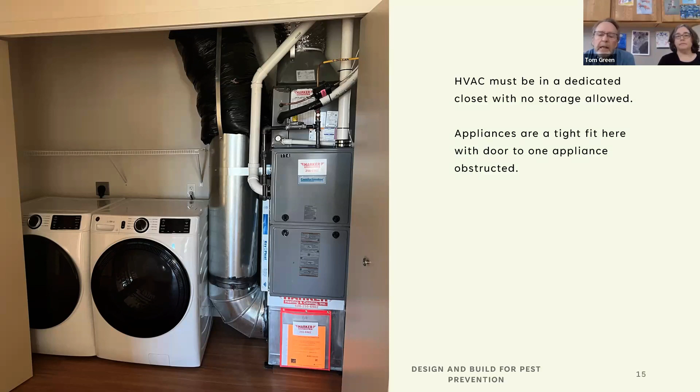There are utility closets in each of the units. Some were designed with just the HVAC units in there, and some with a combined configuration with the laundry equipment and the HVAC, which is not ideal. You really want the HVAC in a dedicated closet. In some cases where that was the case, the closet has extra space, which is attractive for storing things, creating fire safety and other concerns. You really don't want that happening. So that was one of the design issues we ran into as well.

So we talked about, for the next couple of phases, let's just have dedicated utility closets where the HVAC is in there, and let's take that extra space and put it outside of the closet so it's usable space.

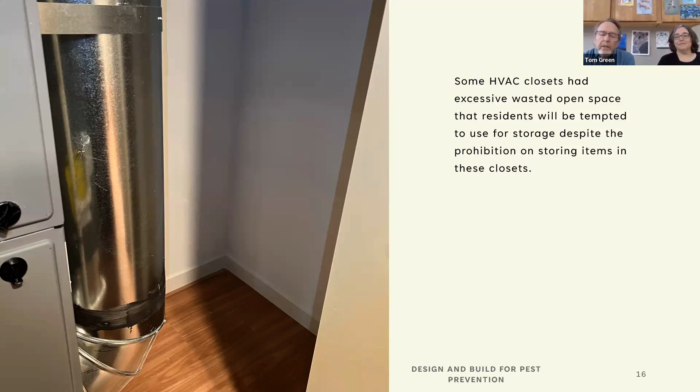So we're going to be struggling with encouraging residents not to store items in here, yet there's attractive and usable space in there.

This was another issue. We have some exposed wiring that runs from that HVAC into the wall here, and if residents are storing things like brooms in the closet, this is going to be really vulnerable to getting pulled out of the wall.

You'll notice too that the gap in the wall is sealed with fire caulk, which is really not ideal. Fire caulk is that red clay material, and it's designed to prevent heat and flames from traveling through a penetration.

But it's not elastomeric like a sealant would be that we want to use to close up gaps, so that as this wire gets bumped and flexes, it doesn't open up a hole there.

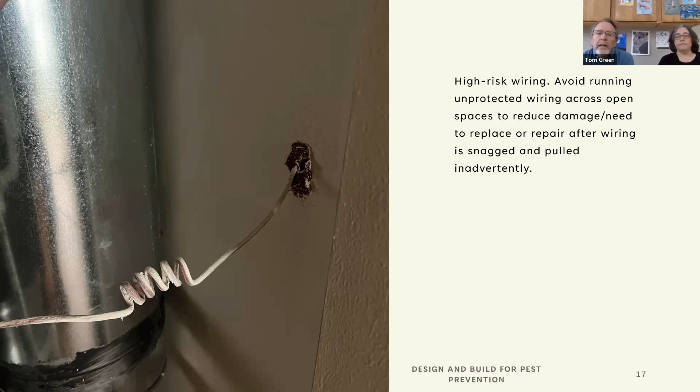And so we went through and ended up resealing these situations here.

And that, of course, is great cockroach harborage and travel away from that under sink cabinet out to the kitchen.

So the cabinets are built and then fitted into these units. The units have various designs with different shapes and lengths and so forth.

And of course, that's very problematic as harborage for both cockroaches and mice.

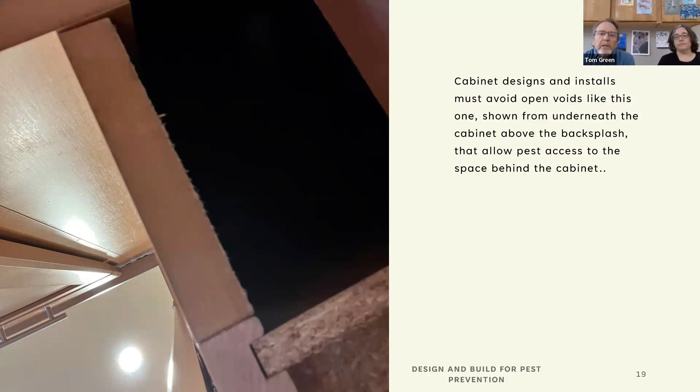The wiring for the fan and the hood underneath the range runs through the upper cabinet, and so those wires run through the base of the cabinet, as you see here.

None of those openings were sealed up.

So this is all work that we ended up having to address after the fact. And really, these-

The wiring here should not be running through the panel there. It should be hardwired, and the wiring should be in the wall behind the cabinet and not running through the base of the cabinet. So another design issue there.

And of course, this is ideal cockroach habitat and needed to be sealed up after the fact.

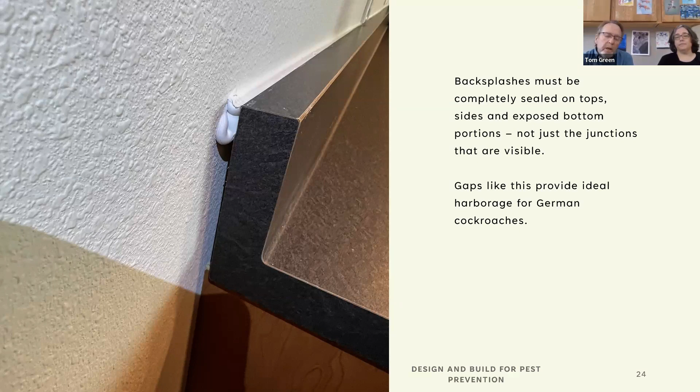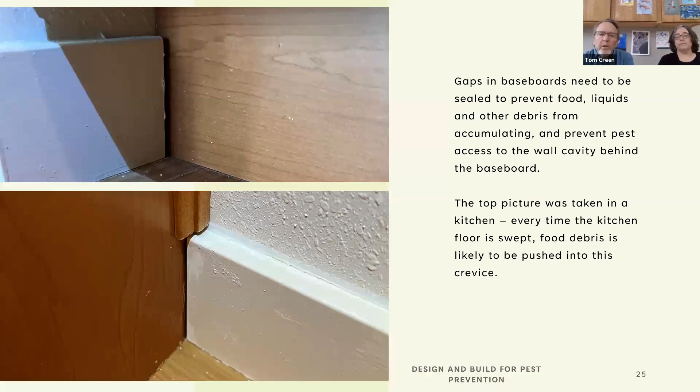And so we went through and pulled out all of those ranges and sealed up these gaps. Here's some other examples of gaps that provide great cockroach harborage down at baseboard level. The bottom example is in a bathroom, and the top example is in a kitchen. So again, we went back through and sealed up all of this after the fact.

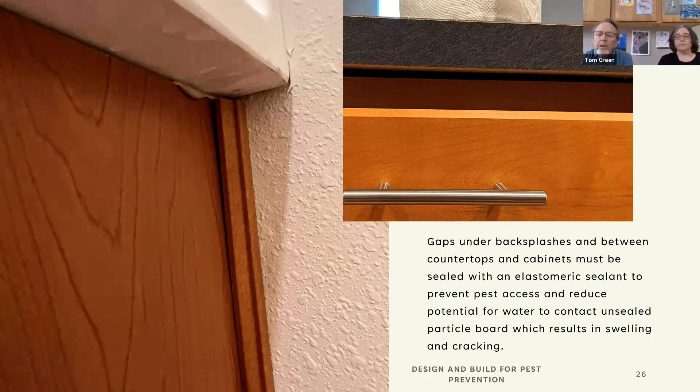Another gap here where the trim piece was just not put in tightly all the way up, and of course, that's great harborage for cockroaches. And then on the right, many of the countertops didn't meet up with the top of the cabinets, providing a great travel way and harborage for cockroaches. So we went through all the units and sealed those up.

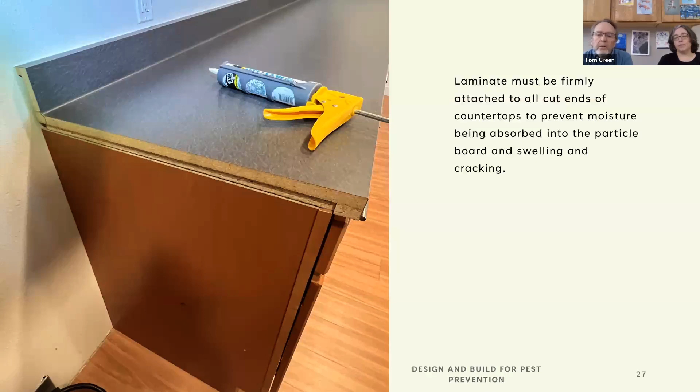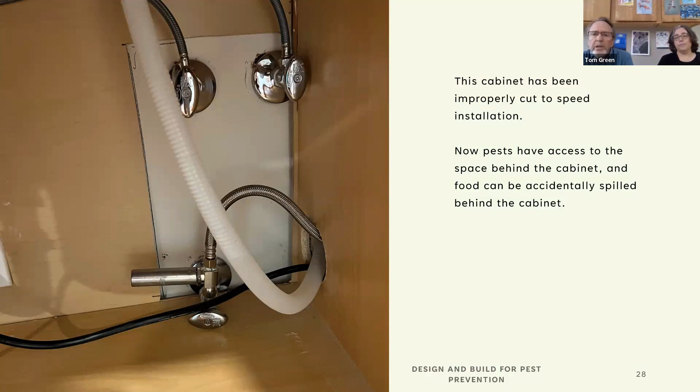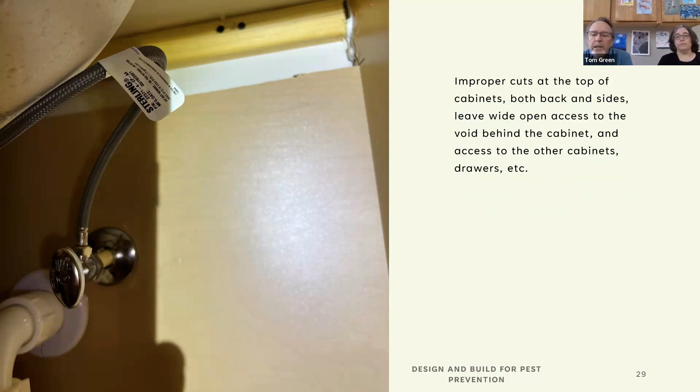So what we had to do was go back through and seal those, and we'll show you some pictures of those. Here's another cabinet that was cut quickly, cut short. You know, if you cut things short, you know it's going to fit in there, and you don't have to fuss with it. So that's what happened here.

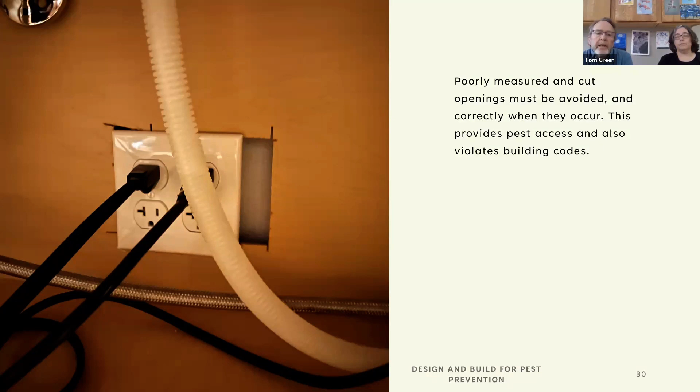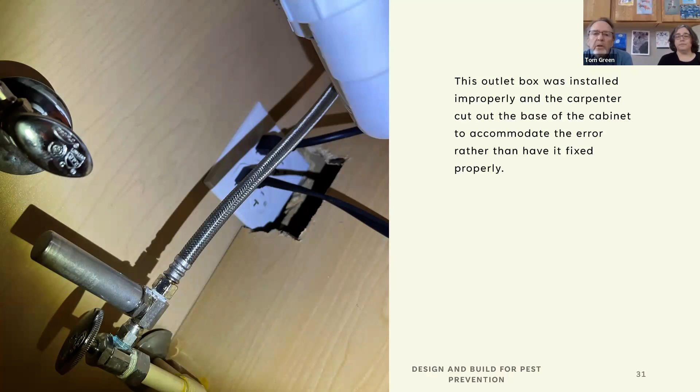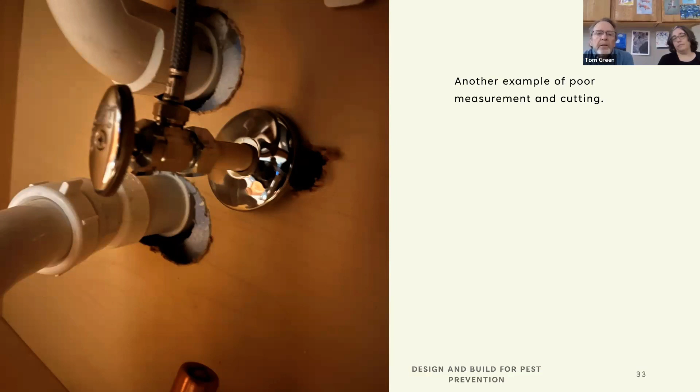So here's an example of some of the corrections that we made. Each of the under sink cabinets had connections to the adjacent dishwasher on the other side of the cabinet wall here, and there was a large round hole cut there for those penetrations. What we did was take Xcluder material. This is the stainless steel mesh, and we stuffed that penetration to the dishwasher with that to create a tight seal.

And that allows us, when we need to pull that Xcluder out to change a dishwasher, for example, there's no sealant in there, that's just a very tight fit. I like to use the Xcluder blocks for something like that. They're 2-inch by 6-inch by 2-inch strips, and they work really well for that. And then there's some Xcluder used as well adjacent to that electrical outlet to seal that box up and still allow it to be removed if that electrical ever needs to be repaired or something needs to be replaced there.

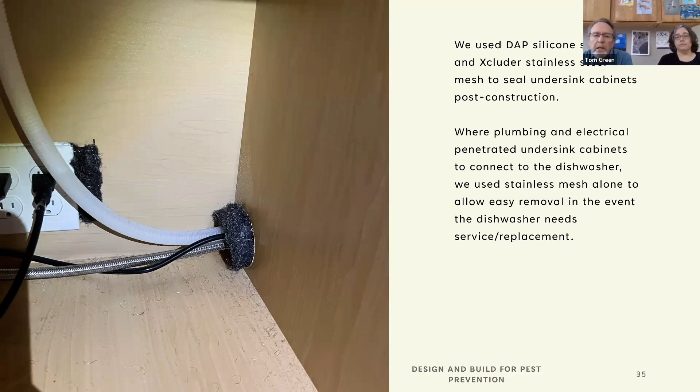Here's some examples where we did seal in the Xcluder strips. I also use the 1-inch strips that come in rolls. They're easy to use in a situation like this. What we did was use an elastomeric sealant, caulk with silicone in it, to glue this Xcluder permanently in place to clean up the issues there. So now, no more harborage, no more travel ways behind the cabinets.

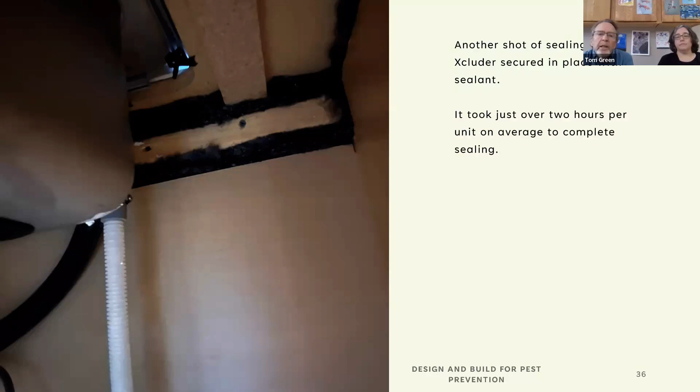Another thing that we did is we went through all of the units and sealed underneath the baseboard. It was rare that the baseboard was really tight against the floor; there was almost always some sort of gap there. Again, we used a caulk plus silicone sealant, and the product we use goes on white, so you can easily see where it's been applied, but then it dries clear. So the white lines that you see under the cabinet, along the baseboard, around the toilet, those all turn clear as that material dries and doesn't stand out at all. It looks very attractive.

You know, there's a debate about whether you seal under toilets or not. I'm a toilet sealer. Some people are not.

In this situation, in this community, we have residents of different income levels, different ages, different health statuses, different physical abilities, just like any community.

What I find is if you don't seal around the base of the toilet, you will invariably get urine spilling and getting underneath that toilet, ending up with odor issues. So I seal. At some point that toilet will have to be removed and the seal cleaned up and replaced. It's a little extra work, but it goes a long way in keeping that flooring in good shape. If liquid gets underneath the toilet, it gets soaked up by the cut edges of the flooring material, causing swelling and buckling over time. So I'm a sealer, and that's an example.

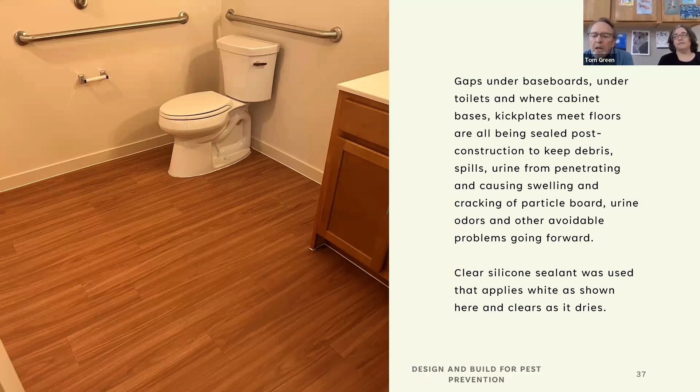This is an example of behind a range. When we pull out the oven and cooktop, you can see there's an anti-tip bracket here, a tip-off that we've got a range going in there. The baseboards weren't complete behind those, and there are a number of reasons why you don't want to leave a situation like this.

Number one, cockroach harborage. There's space now between that floorboard and the back wall board. You can see there was a piece of wallboard scabbed in to cover the gap between the bottom of the big wallboard piece and the floor, and that gap wasn't sealed. From the carpenter's perspective, nobody's going to see this, so they just leave it like this and shove the stove in.

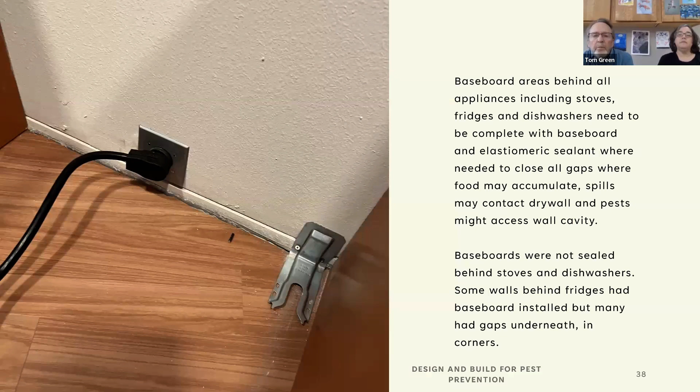But now we've got cockroach harborage, and gaps that might entice mice to chew through and make a larger hole, because they can sense airflow coming through the gap and understand there's a cavity back there they could use for nesting. We're also going to have an endless stream of food debris spilling off that counter and the back of the stove, collecting in those gaps. So we went through the units and cleaned all this up, and now that's completely sealed.

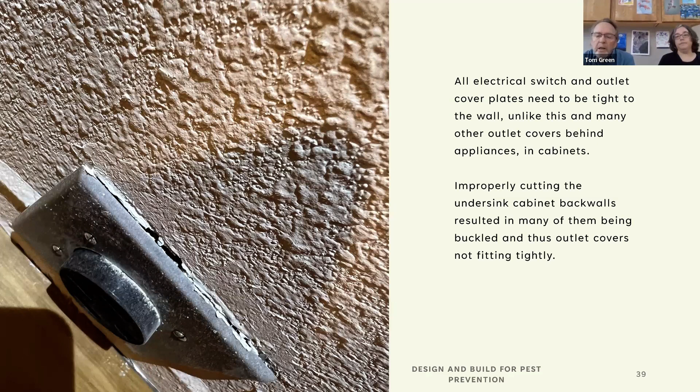Here's another gap, just incomplete sealing, somebody in a rush doing this work. We went back through and sealed that up for all the reasons I just mentioned, harborage and places for food to collect.

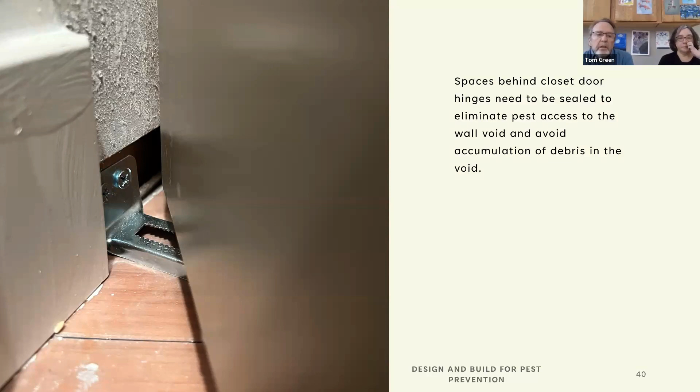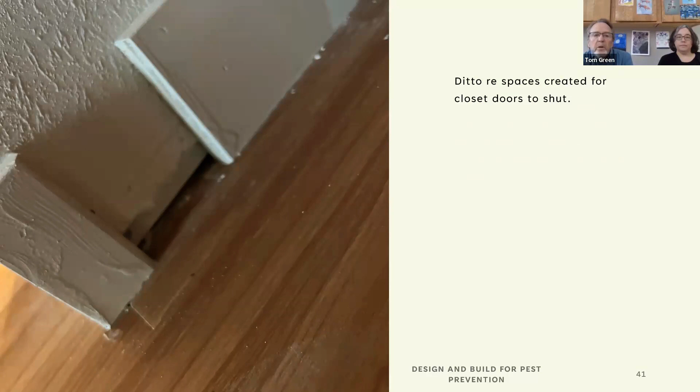Other gaps: the closets throughout the units have these accordion doors, and where the hinges were attached there was often a gap right into the wall, so you could see the insulation, creating a mouse hole. We sealed the bottom of the baseboard there and stuffed those holes with Xcluder. Here's where the closing part of the door meets the wall, and again the builders left gaps there, out of sight, out of mind, but we sealed them up.

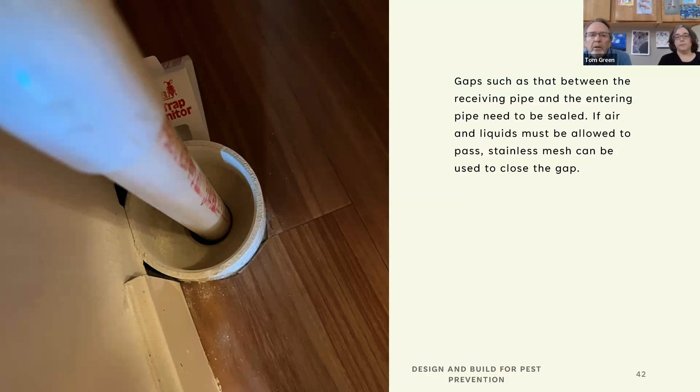This is a drain in an HVAC closet. We have the issue with the incomplete baseboard on the left, so we sealed up those gaps. Then I take some of that Xcluder material, which allows air and liquids through, and put it around this bowl where the pipe is going through. If there was a leak, it would allow liquid to go through the Xcluder and down the pipe chase, but it doesn't allow cockroaches to use that space for harborage.

Another example, HVAC closet plumbing penetration. We followed up and sealed that. The escutcheons weren't sealed to the wall, which is certainly in the design document under pest prevention by design, but again it was overlooked in the final construction. So we went back through and sealed all these penetrations.

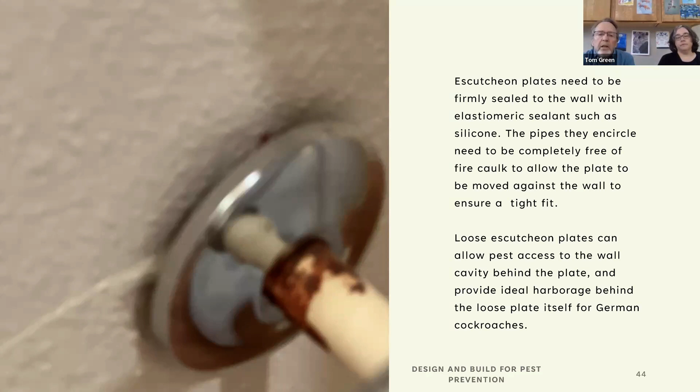That red stuff you see is actually fire caulk, and it's not productive in this situation because it dries hard. So what we'd have to do is clean that up in order to push this escutcheon plate against the wall, and we put elastomeric sealant behind it before doing that, so it stays attached to the wall. Another example, plumbing penetration, this one sealed with Xcluder.

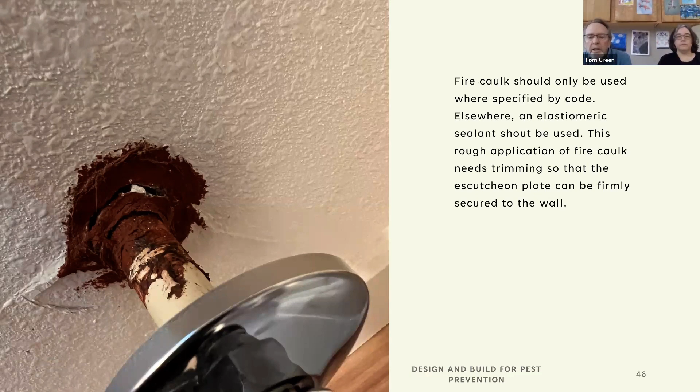Here's an example of that escutcheon being held away from the wall by fire caulk. We clean that up, seal it, and push it against the wall, because if you have that escutcheon plate held off from the wall by a quarter inch, you're creating great cockroach habitat behind that plate, even if they can't get into the wall. So again, just cleaning up and sealing that escutcheon plate to the wall.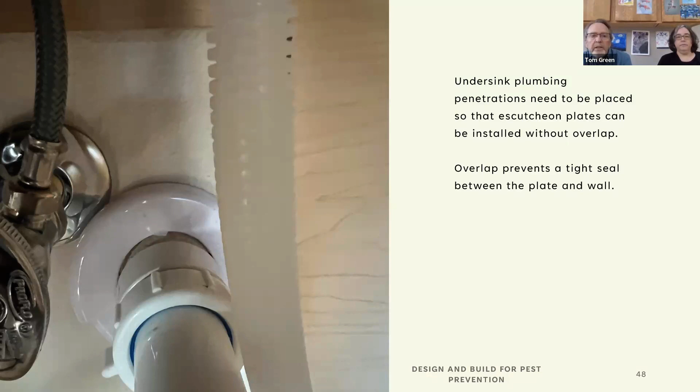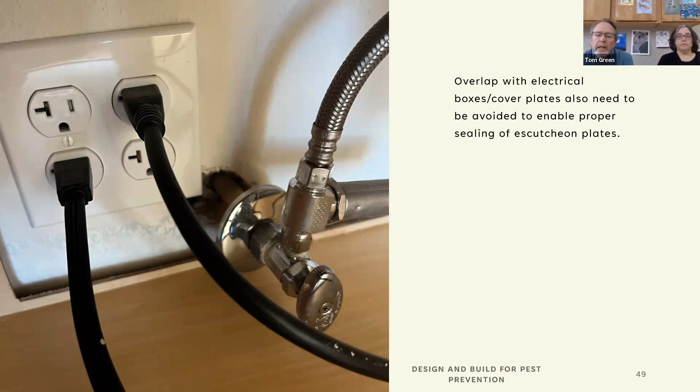Another example here where the escutcheon plate couldn't be fit because of the placement of the plumbing, and the electrical box was too close, too tight.

So that's I think a good overview of design issues and installation issues that we encountered in the building after it was turned over, on the interior. And we also had some exterior issues as well, and we'll go through those.

So just last week, Diane sends me a text saying, 'Hey Tom, can you look at this ground floor unit 119? The resident is reporting a squirrel building a nest.' So here's a design issue that many of the units suffer.

The units have balconies constructed out of wood, as you see here. The first floor units have these ledges on top of the masonry. So the first floor walls are masonry, and then up from there it's the wooden siding. And so there's a lot of these ledges in the outdoor patio areas of the ground floor units where that wall of the patio meets the joists for the deck of the unit above.

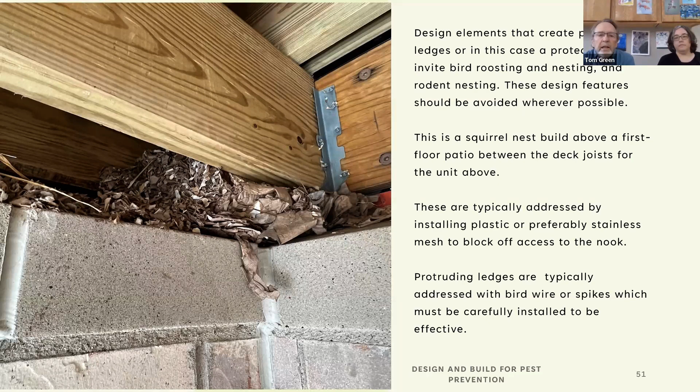And we had a squirrel already take advantage of that. So I came over right away. I wanted to try to get that nest out of there before the squirrel had young ones in there, and I managed to do that successfully, clean that up. But we'll have to go back through all of those cavities and block them off. What I like to use is stainless steel mesh, doesn't rust, stays pretty looking, with a quarter inch mesh, and we'll just cut pieces and staple them there to close up those gaps.

Another issue with the board siding on the building is that the siding boards are not tight against the siding board below. And of course, there are multiple pests that are going to take advantage of that situation - box elder bugs, stink bugs, lady beetles. And if they can get under that board, they most likely can figure out how to get into the building through gaps in the flashing and wind and waterproofing.

As you remember, we saw lots of examples of out of sight, out of mind, where they'll be able to find their way into the building. Perhaps not into the interior of the units, but into the walls of the building, because we've done a lot of sealing on the interior to keep them from getting into the units themselves.

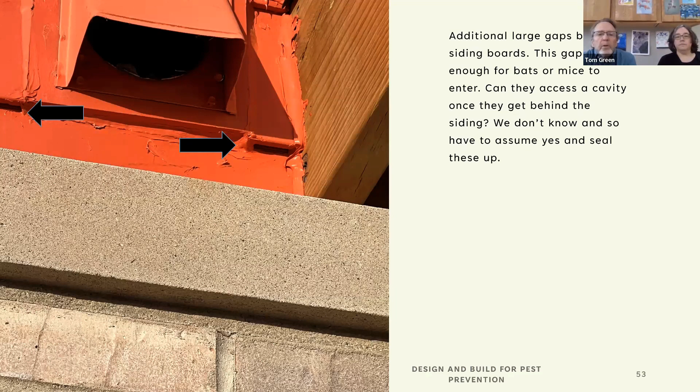Here's some other gaps, again out of sight, out of mind. You can see that bead of sealant behind the black arrows there - so that individual sealed that up but left these other gaps open. Some of these gaps are plenty big enough for bats to use, for example. And here, of course, is a bug coming up to take advantage of one of those gaps to spend the winter. So gaps between the butt ends of the siding boards need to be sealed as well.

And just more examples of poor sealing, out of sight, out of mind sealing. There were people who were responsible for going through and sealing all of these joints, but where it wasn't visible, they didn't pay close attention.

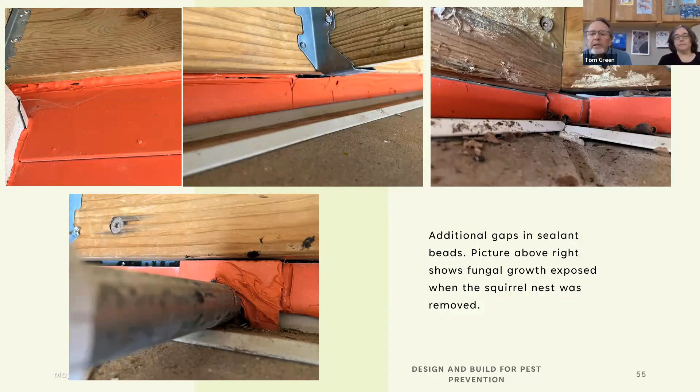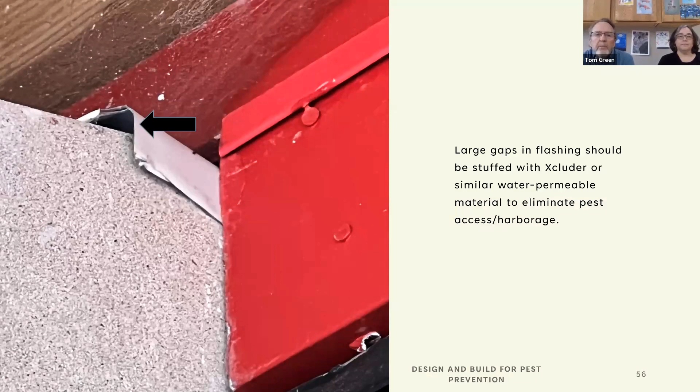Another example, flashing. So something like this, we would use Xcluder material. It would allow any moisture to come out through underneath that flashing, but it would not allow critters to get in.

Just more gaps here. I can bet you dollars to donuts that sooner or later, some stinging insect is going to find that hole and make a nest in there, and then it's a big job to come and get rid of them. So it's really important to get these holes sealed up. It will save us a lot of time and money down the road.

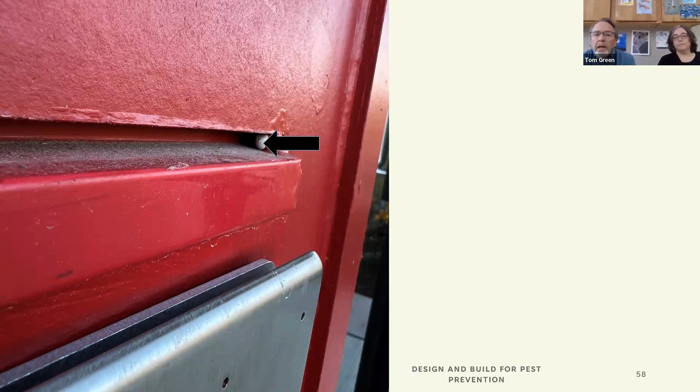Okay, another example here, just a small gap, but perfect for yellow jackets to nest in.

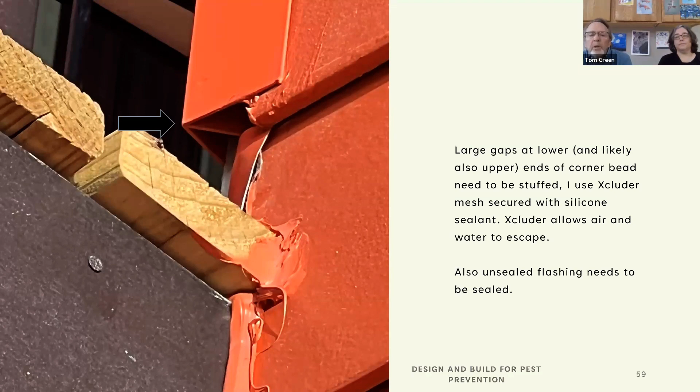It takes very little time to get that done, and it solves problems down the road. Once you get a rodent in a space like that, they're going to make themselves comfortable, and they're going to chew on the end of the siding board there, and cause lots of problems. And again, when they move out, they may be leaving parasites behind. So you just don't want to leave those harborages unsealed.

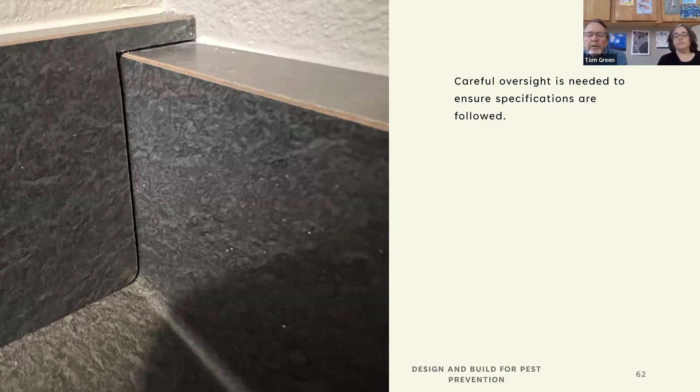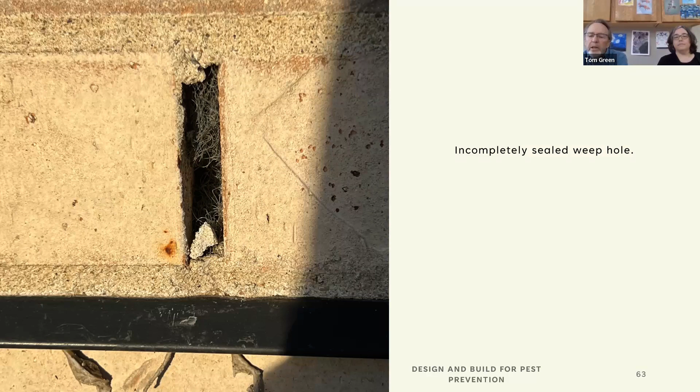So just another example, poor follow-up inspection, big miss on the sealant here outside.

Just a summary now on our last minutes before the question section. Things to think about as you're designing your renovation.

Avoid cabinetry with unnecessary gaps built into the design that you're going to have to go in after the fact and seal up. Those gaps between the false drawer fronts in front of the sinks and the cabinets, we're not going to go through and seal all of those right now. But if a unit does get a cockroach introduction and ends up with a problem, we're going to go through and seal them at that point. But we're not going to invest the time and energy to do all of that now.

I mentioned the HVAC closets, really important. We sent information out to the residents saying don't store anything in the HVAC closets. But that's really not practical when you've got that attractive storage space right next to the HVAC equipment, or when you've got the laundry equipment in there already - you're not practicing what you're preaching.

We've had some issues with the carpet transitions. Again, that was more of a quality assurance issue where the carpet was cut too short and the edge of that carpet didn't stick far enough through the transition cover to stay in there and have the edges be protected. So some of that's had to be redone.

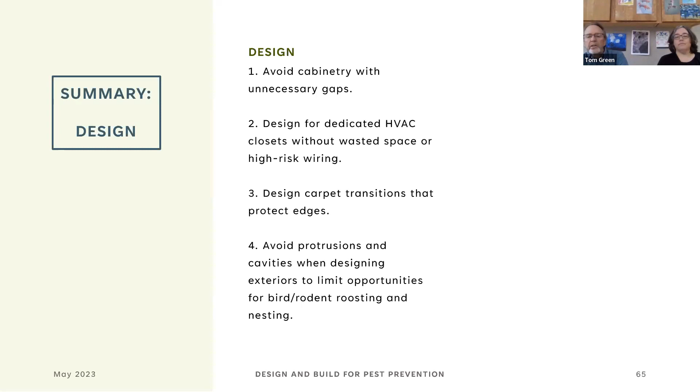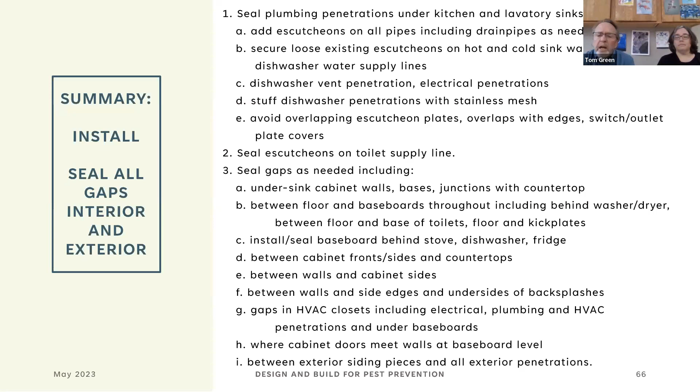I won't go through all of this, but we put together a detailed list of things that we're trying to avoid. You can access the presentation on Susanna's website, download it and print it out to use. Rather than giving the builders a 40-page document that they then gave to the architects, which really wasn't paid attention to the extent we thought it would be, we have this shortcut - only 2 or 3 pages - that focuses on the gaps we saw in this phase 1, to make it easier for the designers and builders to address our goals.

So definitely you want to make sure right at the design phase that you're getting this information to your architects, and they understand this is over and above the firestopping they're used to dealing with. This is pest prevention, and we want it in the specifications. Then you really have to partner with the builder and supplement their oversight, because their people are not trained to recognize the stuff we're trained around pests.

You want to inspect all units. In this first phase, we just did a sampling of units, and when the building was turned over, we found all these other issues in the other units that we needed to address. A great idea, if you can do it, would be to fully complete a model unit. We could have had our first phase be a smaller building where we could have gone through this process with the designers and builders and gotten everything right before we built a 48-unit 4-story building to learn on.